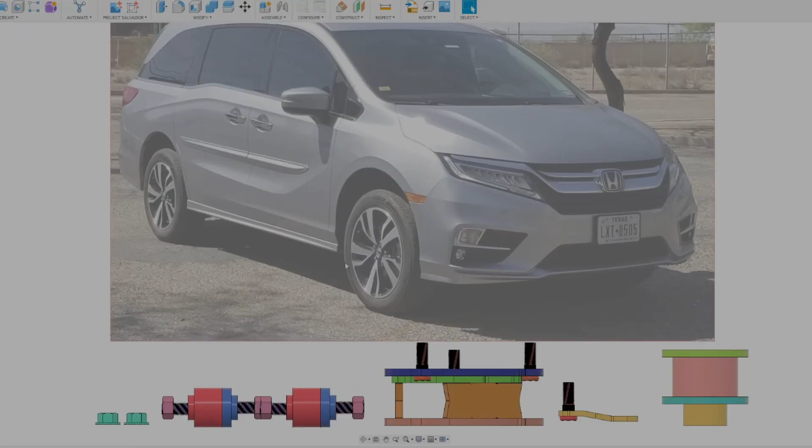For the 2025, fitting the new generation of Honda minivans. What you get in the kit is this nice collection of parts here. So these are the front spacers. This slot here is your camber adjustment. Our kit is unique in that we have the ability to adjust the alignment camber after it's installed. No other kit on the market for the Honda vehicles is doing that.

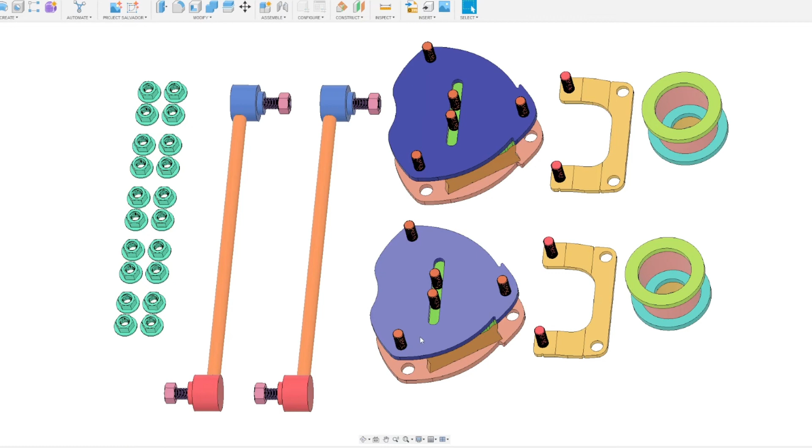Because of that, though, of course, we have to give you all these nice 10mm nuts to go with it, all over the place here. We also include in this kit the rear 2-inch spacer with matching shock relocation here. The shock relocation brackets go here, and it drops the shock mount point down 2 inches to match the spacer.

Also included in the kit is new shorter sway bar links. On MacPherson strut vehicles, we need to make the sway bar link shorter instead of longer like you might on a Ford or a Jeep if you lifted it. It seems counterintuitive to many, but we include the shorter sway bar links with it.

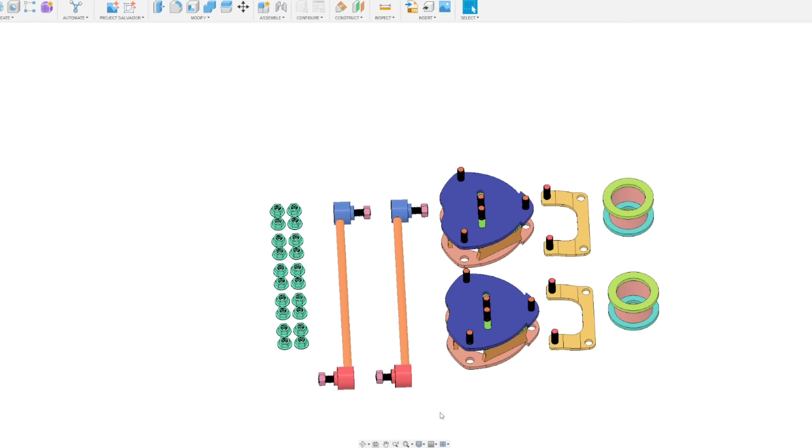You can align it easily because of our camber plate. Toe is of course still adjustable. And it's been quite a popular kit for us. For people that want to put a larger tire on it, I recommend something like a 265/60/18, about a 30.5 tire as a maximum. The van comes with a 29-inch tire stock, so you can get about another inch and a half at the most.

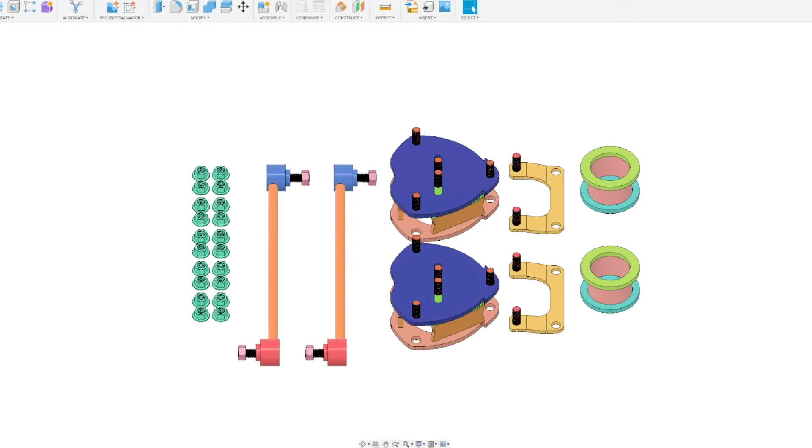Most of your rubbing will be on the front air dam. It's hard to get around that without trimming. This is the 2-inch kit. If you want something larger, we do have a 3-inch kit, which requires subframe drops front and rear, and a bunch more parts. But this has been probably the most popular one for the new vans.

Installation time is 3 to 4 hours plus an alignment. It's fairly straightforward. People do find it easier to install it on the front if you drop the subframe down and give yourself some clearance. Other than that, it's pretty straightforward.